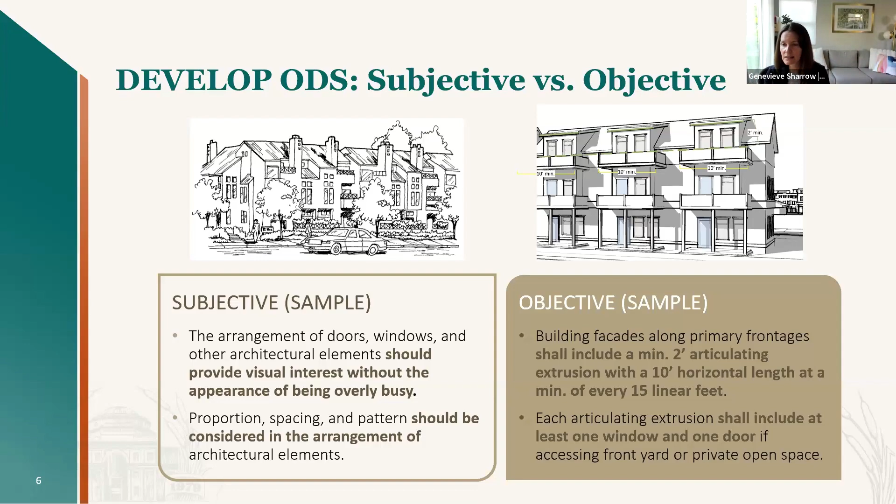We've also included, to make it as unequivocally clear as possible, some user-friendly checklists, which Kelly will also discuss, intended to make the process as clear for staff, the applicant, and the public as possible.

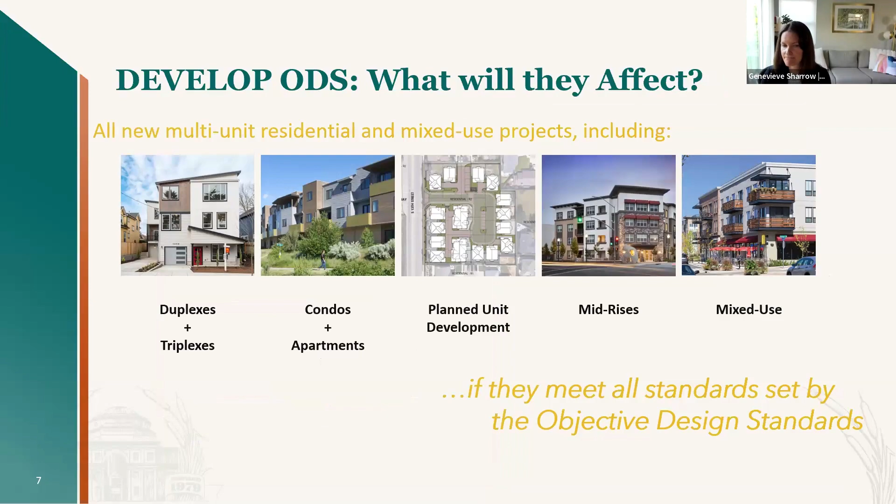So where will these new standards apply? State law states that objective standards should apply to all new multifamily residential projects and any mixed-use projects. So these will apply to duplexes, triplexes, all the way up to mid-rises or mixed use, if they meet the objective standards we've crafted. The objective design standards will apply in all city zones that allow those uses - multifamily or residential, and mixed use zones.

So with these new standards in place, Phil touched on the process moving forward. Development that's fully compliant with these objective design standards and all other requirements of the zoning and municipal code can go through this streamlined review process, limited to a construction permit review, CEQA exempt, and if compliant, can be approved ministerially.

However, the existing review process does remain in a variety of cases. It would remain if a project doesn't comply with the objective standards, and for any projects that are large, 50 or more units, or any mixed-use projects outside of downtown. Those three categories would continue to go through the conditional use permit process, including review and approval by this Planning Commission.

I wanted to provide a little bit of background on the process to date. We've been talking about this for a while now, I know you've been hearing about it for a while. We began back in June 2022 with stakeholder interviews. We talked to city council and the fire chief, local architects, and tried to identify the key issues that need to be addressed in the update.

Then through two working sessions with the city council during that summer, we further refined what the project should be and what the general design goals should be that were really the priorities for the city of Atascadero. In particular, we heard the desire to streamline development, but a real concern to retain the city's existing tradition and eclectic nature, and a special focus on outdoor gathering spaces, pedestrian vitality, and careful transitions to single-family neighborhoods.

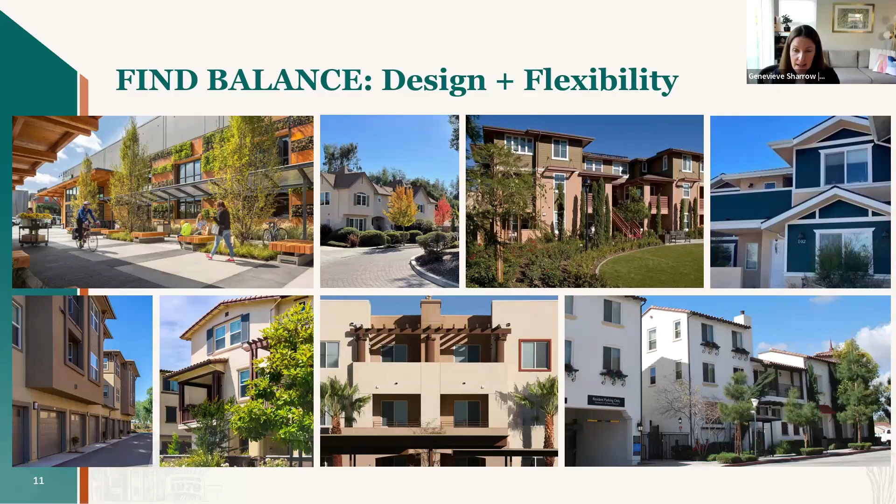Throughout the outreach discussions, we heard a common theme, which we infused into the draft standards: a balance between ensuring design quality reflects the high quality architecture that Atascadero wants, while providing the flexibility for architects, developers, and property owners to complete the projects they envision. So with that background, I'd like to dig in a little bit into the draft objective design standards.

As Phil said, the objective design standards can really be broken up into two main components. The first, which I'll focus on first, is the building design standards. These are the traditional objective design standards we think of, the design of the building itself. The second component is basically everything else, the site planning, trash enclosures, parking, and other amendments scattered throughout Title IX. We'll discuss those second, but start here with the building design standards.

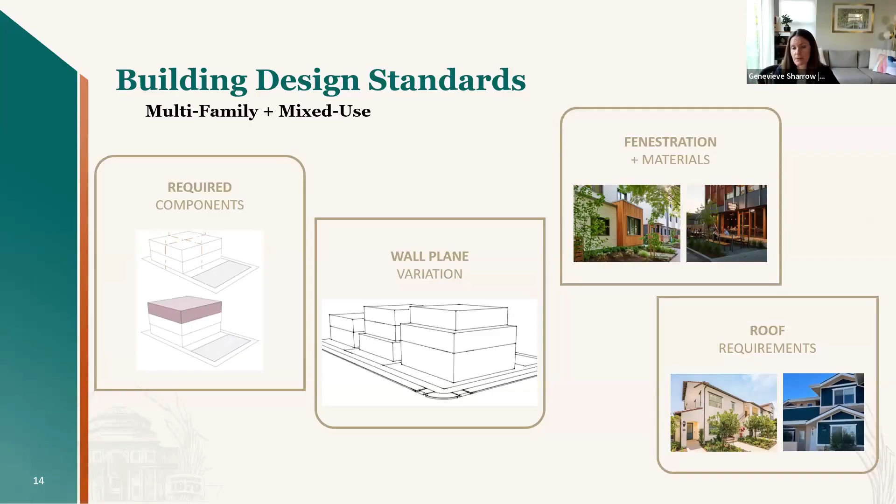These building design standards were drafted to address the input and direction we received from the community, to have clear flexibility built into the process. So there are menus of options for various topic areas, including how you can vary a wall plane, different materials and fenestration you can use, or different ways to vary a roof to provide interest. And then there are some standards that will be required for all new development to comply with the objective standards.

Each tier, those categories I just mentioned, are also referred to as tiers in the draft standards. Each of these tiers contains several different ways to approach that particular design type, different design elements that applicants can choose from to create their unique and high quality building designs while maintaining flexibility in the design theme. So the standards are structured so that larger buildings are required to provide more articulation or features to add to that design.

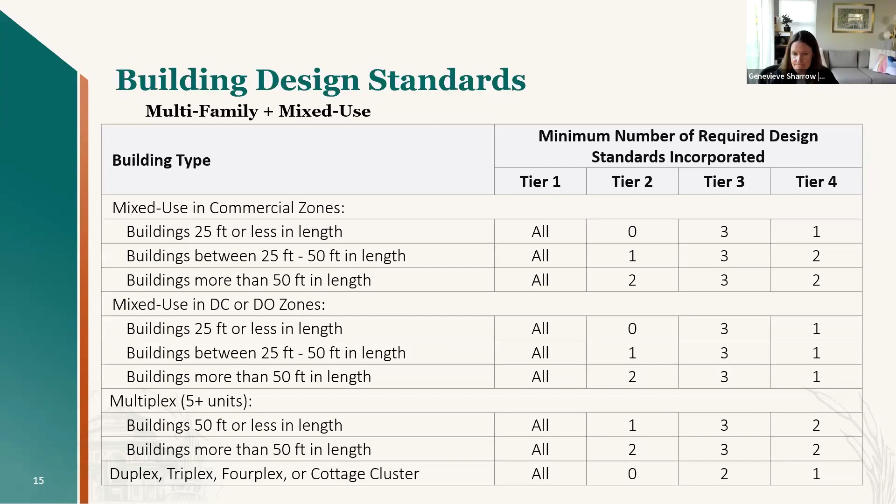The Tier 1 components are those that are required for all new multifamily and mixed use development. This tier includes a minimum ground floor height in mixed-use buildings to maintain viable commercial spaces, minimum transparency requirements for both residential and non-residential building spaces -- that's the windows and doors percentages -- and a limit on how long a blank wall could be.

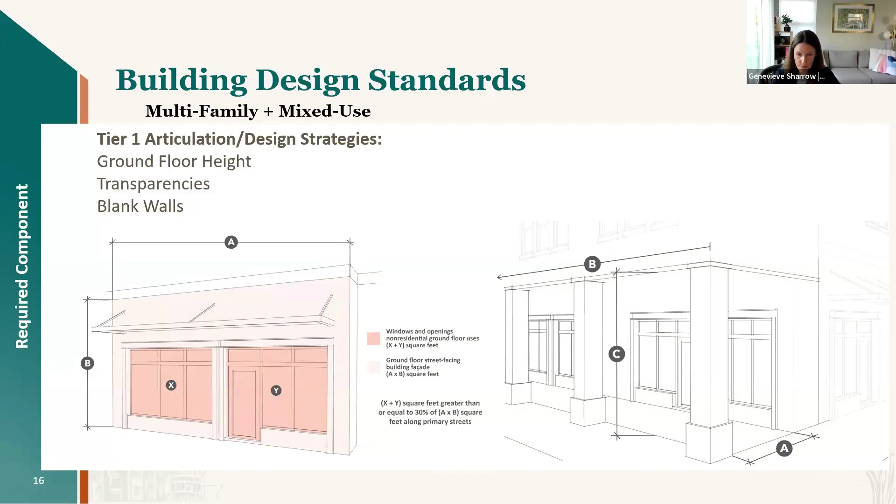Tier 2 design strategies pertain to wall plane variation. This tier is really important, critical to the creation of depth perception in a building and the creation of what's really important: shade and shadow within the building design. There have been studies in the past looking at what the average person means when they say they like a particular building, and what common feature exists throughout all of those buildings. It was found that it's that shade and shadow that really makes the difference in how appealing a building is to the human eye.

There are many ways a wall plane variation can occur, and we didn't want to limit to a particular design architecture that could not be conducive to certain types of design elements, so we wanted to provide a lot of different design options here. For this tier, longer and larger buildings are required to provide more forms of wall plane variation, and they can choose from a variety: balconies, plazas, upper story stepbacks, or any other kind of general massing break that breaks up the building. Small buildings and duplex and cottage clusters would be exempt from this requirement.

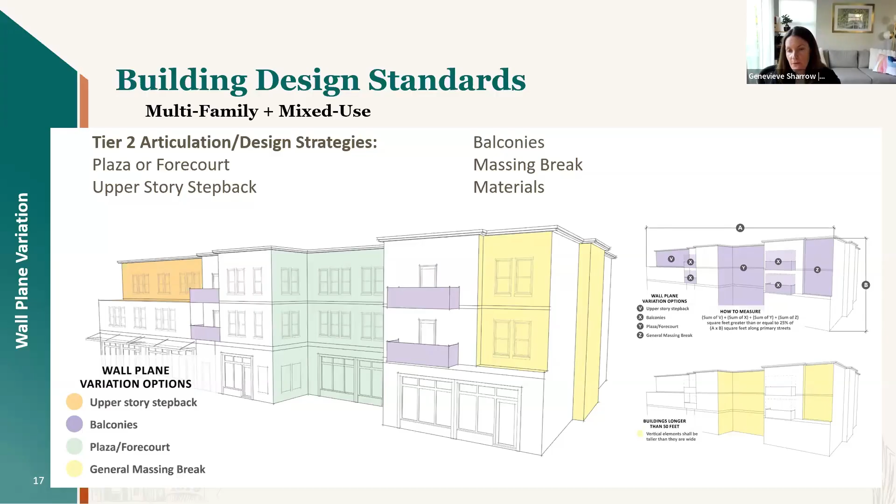Tier 3 design strategies focus on what's called fenestration and materials. Sometimes people refer to this as the gingerbread on the building, but it's really a critical piece in creating interest in building design. Fewer components are required for duplexes and cottage clusters in this tier, but projects can choose from a wide variety of options to enhance the facades, including larger windows, window trim, a window sill or a lintel on the windows. Other types of design like post and beam architecture can also comply, or including a secondary cladding material. So lots of options here to provide for variation.

When we've tested this against projects, it was very clear that there are many ways to meet the intent, and that projects can achieve this goal through a variety of different ways while having added intrigue.

The final tier, tier 4, focuses on roof design. This is really to encourage roof features that provide additional shade or shadow in more traditional residential styles, kind of having a larger eave and rakes and cornices, and also having the option to provide more roof variation with different types of roof styles or increasing gables. There's a variety of different options of ways that this can be met, and there's fewer requirements under the projects in downtown, recognizing the likelihood for more of a flat roof style.

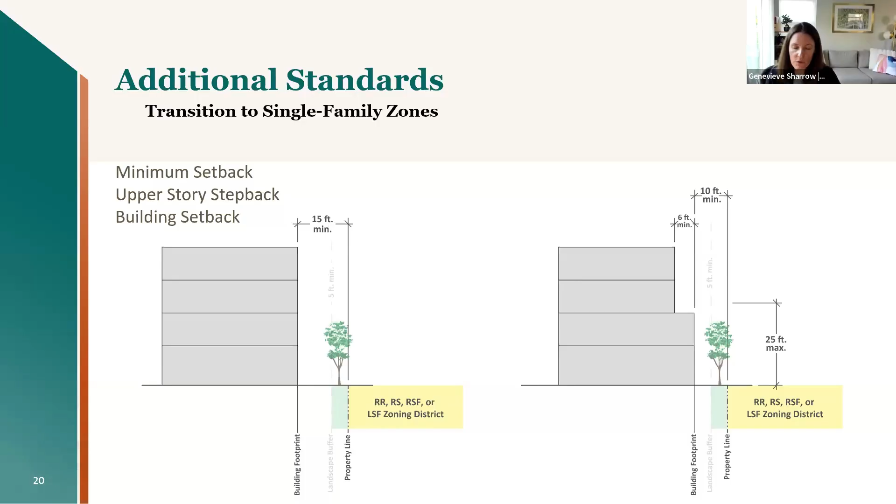A new cottage cluster section is also included with the objective design standards, and the intent here is to provide some flexibility so that the existing setback requirements don't constrain a cottage cluster type development. So these cottage clusters are really intended to foster a more affordable by design style, smaller houses and duplexes. Standards that were crafted center on providing a common courtyard with outdoor open space, which was a key desired design goal throughout the project. Private yards and private garages would be minimized. And then of note, this new section would facilitate future small lot subdivisions as well, outside of the more cumbersome planned development process.

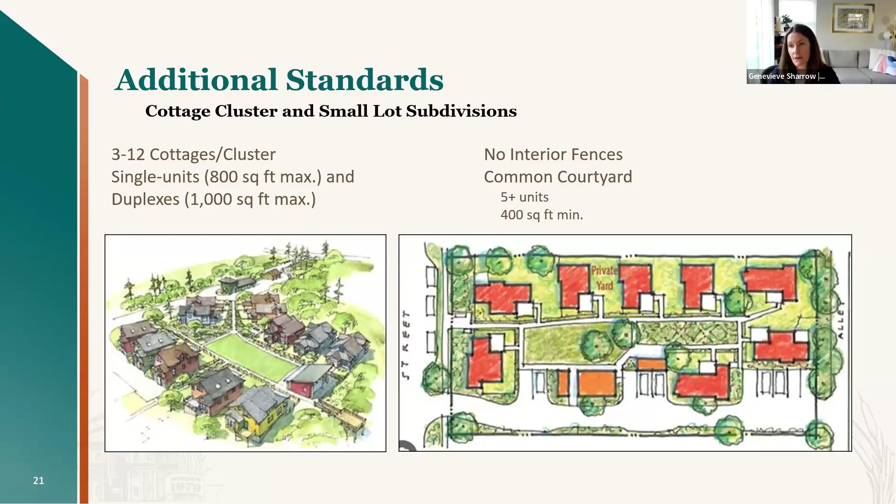Now I'll turn it back to city staff to discuss those proposed amendments in the other section of the zoning code.

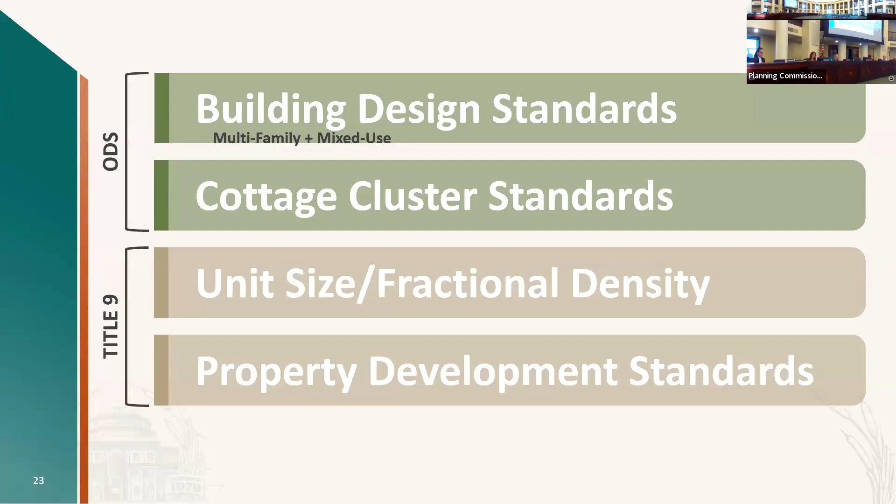Here's the fun stuff, Title IX. This is the other things that are outside of the objective design standards. So this is where we get into the interesting things like fractional density. Fractional density is one of my favorites, actually, because it's something I used to work with quite a bit. In a previous city I worked with, San Luis Obispo, they had this for many years, worked quite effectively, and it really incentivizes affordability by design. In other words, for a smaller unit, it's a smaller density count. So you can do more smaller units or you can do fewer larger units.

For example, in this proposal, a unit up to 600 square feet would only equal a half a density unit. A unit that would be over 600 square feet might be 0.66 of a unit. And then units over 1,000 square feet would finally get to that one density unit. So this program is optional, you don't have to use it, but it's there should you want to fit some additional smaller units and still stay within that density boundary that you've got in that district. I think it's a really good tool. It's not something that's typically included in objective design standards, but something we wanted to include at the same time as a zoning text amendment.

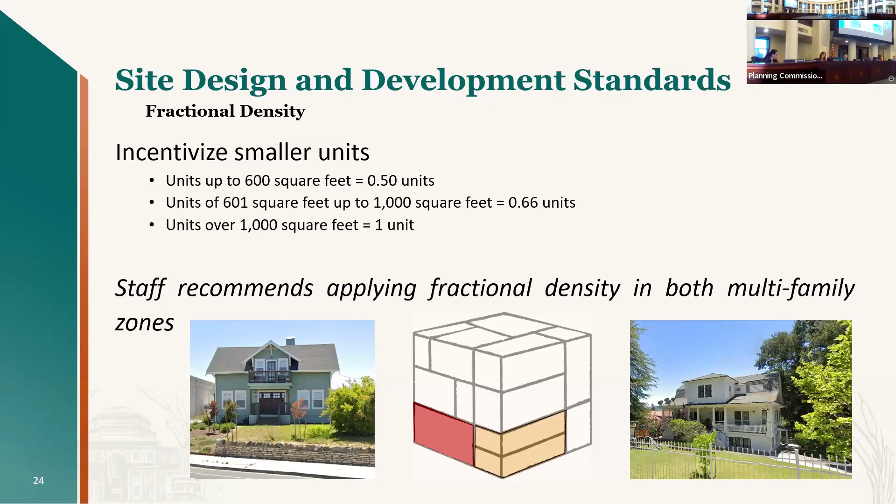And then also going with maximum average unit size. Now pay close attention to the word average. I think 1,200 square feet is the proposal here. We're not saying that the units have to all be less than 1,200 square feet, but in the downtown, to encourage greater density and actually to encourage projects to meet their maximum density, we're talking about this average maximum unit size of 1,200 square feet. So it means you could have several units that are 2,000 square feet, several units that are 800 square feet, several units that are 600 square feet, and you're still going to meet that average when you average it all out. This is something that's quite important because we see a lot of projects that have very large units and we don't maximize the actual number of units.

We don't maximize the density on the property because it just can't fit within the form that we allow for, and so then we fall short, commonly on our RHNA for that reason. This is really only a predicament in a multifamily zone or a downtown mixed use zone where you want to fit in that large number of units. That's where we have that issue.

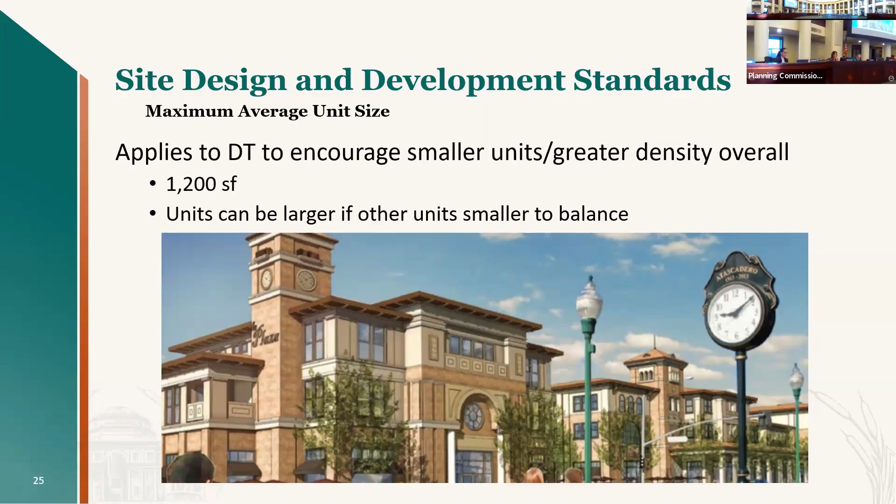So let's talk about some open space. Again, kind of going back to some tier 1 amenities, Kelly is going to give you some of these details and tell you about some of these features.

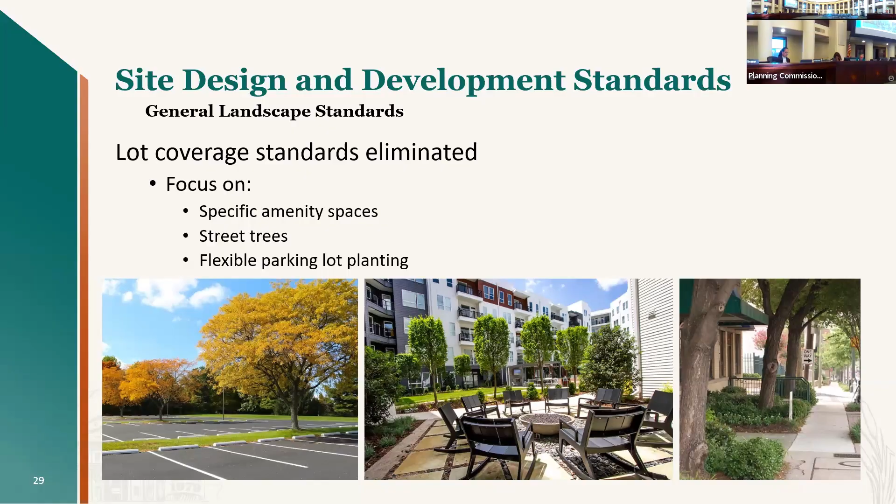We also incorporated some garage standards—I think Genevieve mentioned these as part of the cottage cluster standard, but we wanted to bring specific attention to it. Throughout previous development in Atascadero, the garage and automobile have been a big focus of multifamily development. We find a lot of interest in our area in slightly larger units with private yards and private garages, but the new trend has people asking for more community-based design with shared amenity spaces.

They perhaps have a private area in a yard off to the side, or a porch or deck area, and that necessitates the car being pushed more to the outside. So we have standards that limit garage size for private garages attached to units, to make them disappear a bit more and not be so auto-dominated. We also have standards about how many units can have a private garage, to accommodate community spaces and not give all that land over to driveways. We're hoping to encourage amenity spaces over vehicular spaces, and it's a way to help applicants meet those amenity space requirements.

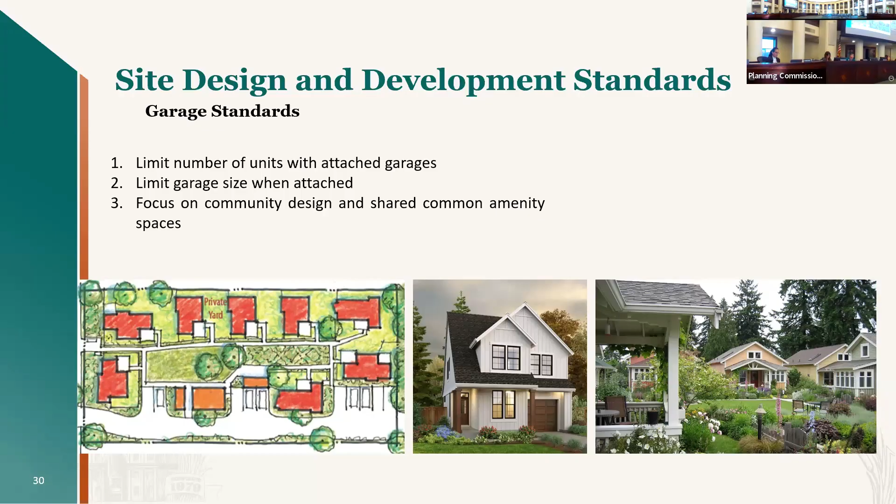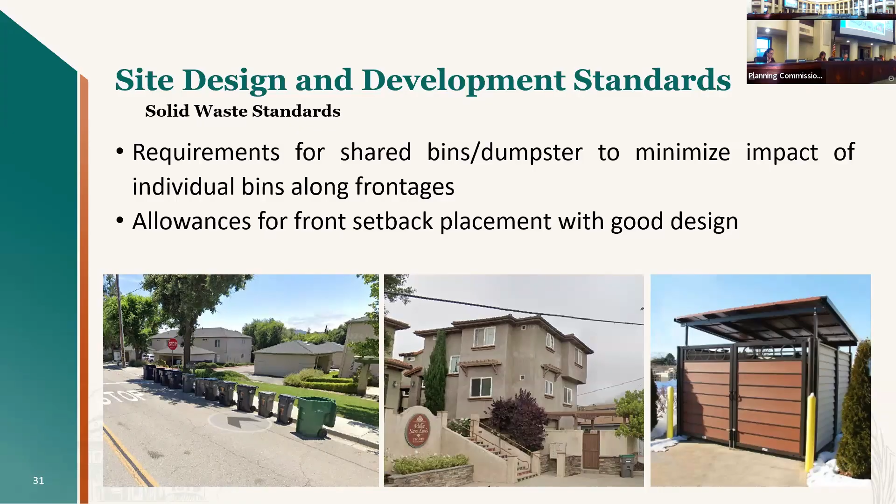So we looked at consolidating that into shared trash facilities. It doesn't necessarily have to be a dumpster, depending on the number of units—you could have bins if the trash company says that's adequate. You could still roll them out to the street, but in a shared situation to minimize the number of bins. We also have standards for what shared trash enclosures should look like, in terms of covering, making sure materials are consistent with building architecture, and ensuring enough room for recycling, trash, and compostables. We also allow placing trash in a front setback if that makes the best design sense and can be designed appropriately into buildings, since that's often the best place for the trash company to service it.

We also looked at our storage standards. Our current code requires 100 cubic feet of storage and doesn't mention much else. When we looked into it, we considered what people in denser multifamily developments actually need storage for—often bikes, outdoor play equipment for kids to take to a park, Christmas decor, and similar items that don't fit in a closet. We found a lot of applicants were meeting the requirement just by providing a wall of bookshelves, which didn't give people usable storage. So we've shifted to a slight increase in required storage size per unit, to accommodate things like a bike locker or storage under the stairs.

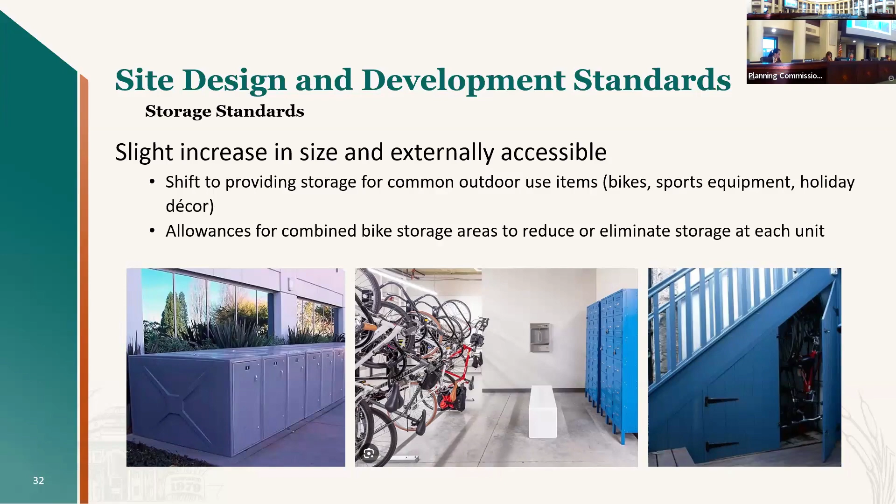We also allow combined storage throughout the development. So similar to our microhomes development, you could have a shared storage facility to store and lock up bikes securely for all residents, or a couple of garages or sheds along the property line that residents could use. Those storage standards are a bit more flexible and larger to accommodate people's needs.

We also looked at lighting standards. Our current standards require full shielding of lighting and no glare visible off-site, but that's open to interpretation—how tall a human is that can see the glare, how tall the light poles can be. So we added additional standards to clarify that.

We used standards we typically see in conditions of approval for use permits, covering parking lot pole height, specific shielding of lighting with a certain dimension of shield that the lens needs to be recessed or shielded, and dark sky compliance, which is a major focus in Atascadero and part of our current general plan.

And of course we have exceptions written in for decorative lighting, which we didn't really have before. I don't know that back in the 80s when the lighting code was written they had a lot of festoon and decorative lighting, but we wanted to make sure our multifamily areas, amenity spaces, mixed-use areas, and commercial areas could utilize that decorative lighting.

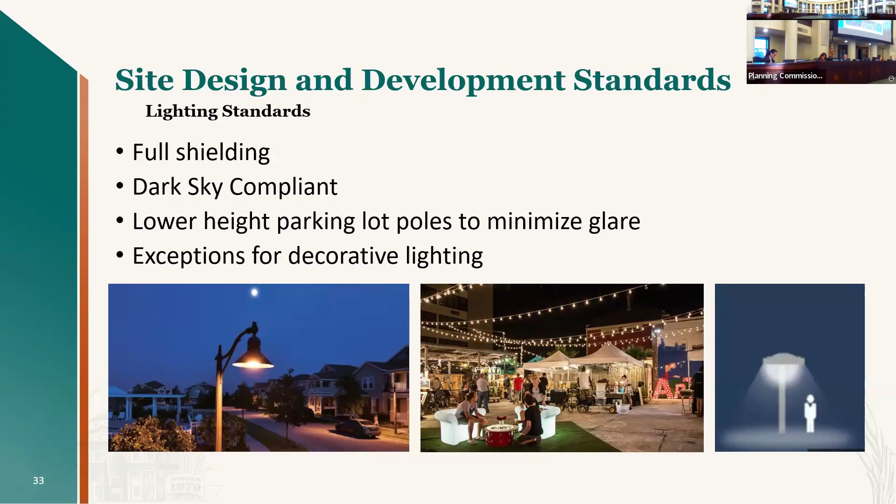Our code right now requires that new development projects put in street trees generally every 30 to 35 feet. In downtown, it's different because the street trees are generally in the public right of way, in the public sidewalk. That's where it makes sense downtown, since downtown is a much more intensive area. We have different standards for downtown.

One of the things we were trying to do through this process is amend the code so that projects outside of downtown could also incorporate street trees, but not in the public right of way, not in the sidewalk—instead on private property. That's where they're more readily maintained by private property owners.

That's where they don't interrupt the public right of way, damage the sidewalk, damage the infrastructure, and there's space for them. So we initially proposed a 15-foot setback for buildings to fit these trees, consistent with what we have in our code today. Right now our code calls for a 15-foot setback for residential projects outside of downtown, even those within a commercial zone, like a mixed-use project. So the proposed code doesn't really change that standard, but we need to clarify what this setback standard is.

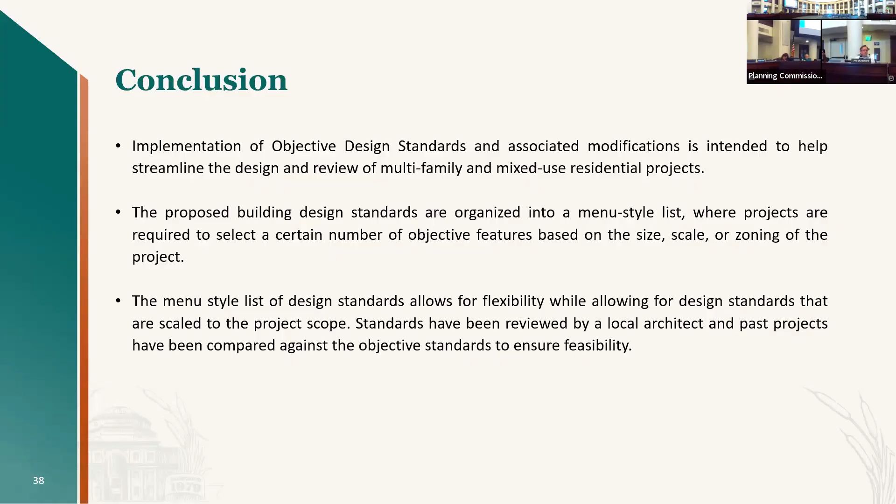The idea is that these are flexible menu lists where they can choose different options to comply. They're not stuck with a one-size-fits-all approach. They have different features based on the size and scale of their project, allowing for flexibility while having design standards scaled to that project. Again, these are not architectural standards that set architectural styles. Instead, they're objective standards about form, massing, setbacks, height, even color, transparency, windows, etc.

So, last slide—is there any big celebration at the end? It's been a long presentation. So the next steps: you can suggest changes. We're going to move forward to introduce this to City Council for adoption. We do hope to have this in effect this summer so that we can focus the rest of our time, attention, and staff time on the general plan update. Thank you.

Thank you, Phil and Kelly. It was a wonderful presentation.

So I'm going to open it up to the commission for comment, and since I have the mic, I get to go first. My first question is—we kind of talked about this a little—how does the density bonus affect these standards? Do they get to throw out the design standards, or what do they get to throw out and what do they not get? My thought is, do they get to come in and build a square building with none of the design standards because they have a density bonus, and make a big ugly building?

That could happen. It all depends on the level of concessions they're eligible for based on the level of density bonus they're doing. But if they ask for relief from standards, they can. So certainly there's a chance that a project that has some affordability—complies with that basic 10% affordability—then gets the density bonus. They don't have to use the density bonus, but they get these concessions. Would they then, because they don't conform to the objective design standards, come before us? So would we at least get to see the project before it's approved?

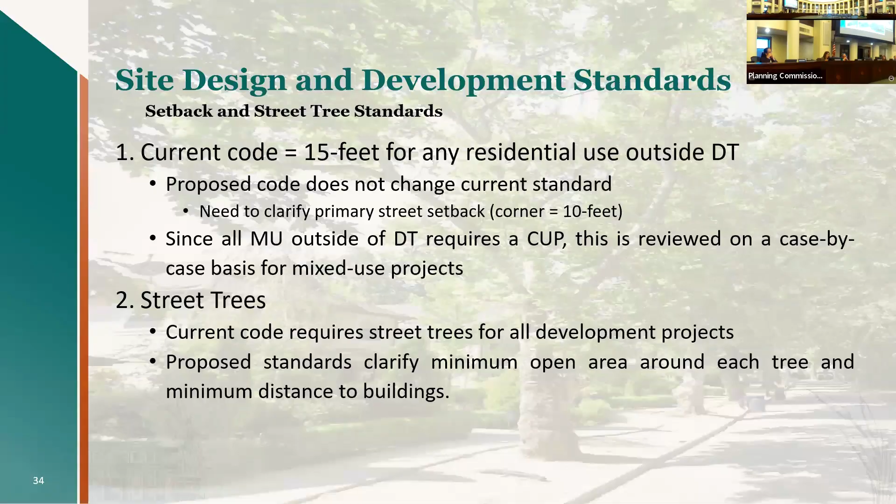Thank you. Yes, Commissioner Kronza. Okay, thanks again. Can we also go back way earlier in the presentation to the piece where it says which zones are actually being talked about for the ODS?

That's way up there, I know. I was going to say, that's a lot of slides. Well, let's just take a little gander again. Let's go back to memory lane.

Okay, so if we look at the multifamily zones, I think Commissioner Anderson made a good point, so I wanted to review that list here. Because I'm really empathetic to, okay, what do we not want or what do we want to avoid, right? But then there's the, okay, well then what solutions are going to get us there? Because if we only look at what we don't want, I don't think that's a holistic management plan for how we're going to get to what we do want. So if we're just trying to avoid something... So, all right, we've got downtown office, downtown commercial, commercial service, retail, professional, neighborhood.

But then it sounds like where you draw the line, not to put the hot light over there, but I am interested in the discussion. For multifamily, not having them incur a fee or extra taxation for more common trees, but something like a downtown taxation district, for some of those more common street trees and landscaping that we want more of and more attention to. I feel like that's where there's a blend between number 2 and some of these other things, where we want private property to cover, like the multifamily, we want to cover their own trees.

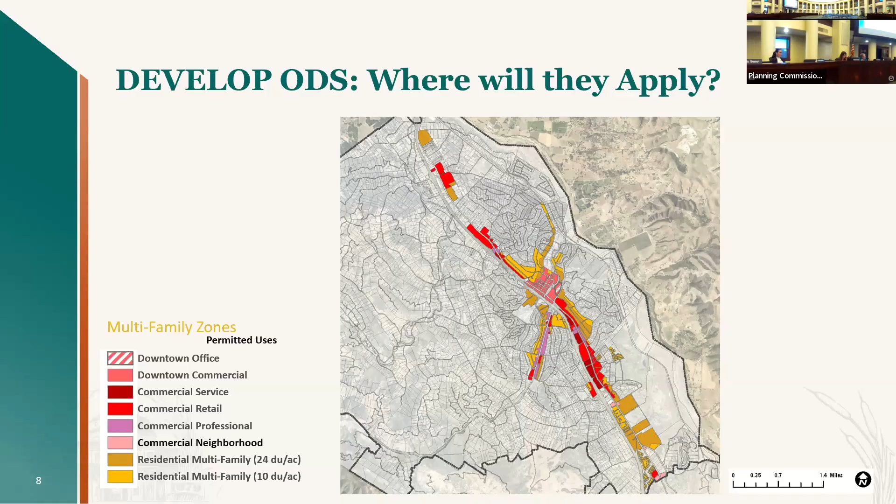If we are on the fence about street trees and we're fine with more pavement, then that could be something to explore, but I wouldn't talk about it as if it could be a guaranteed thing. I'm not crazy about more pavement, but I feel like we need to frame it as an incentive to the property owners - trees are great, you want trees because, and here's what you're required to plant. Because there's social and economic benefit, and environmental - exactly. They're beautiful, they provide shade, the wind rustling through them.

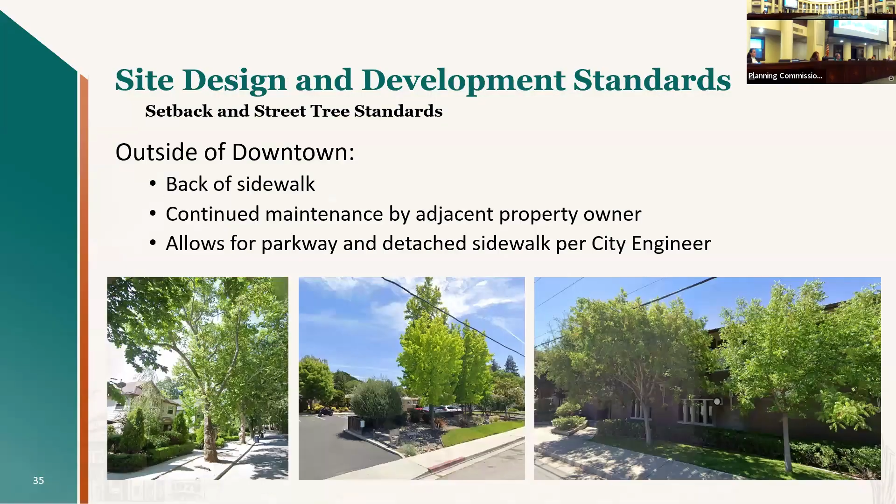Yes, Mr. Vanden Eyck - it is possible to have a landscape and lighting district that just applies to certain properties. It certainly is, of course that would be a discussion for city council to take up, and then it would have to go through the whole 218 process. So that's nothing we can approach today, but I'm dealing with a similar project in the city of Guadalupe where Caltrans is coming through and they want to do this complete streets project through downtown.

There's competing issues between the downtown owners wanting bigger street trees, but they can't be accommodated with a 10-foot sidewalk and zero lot line setbacks with the buildings. So Caltrans is coming in saying, hey, we can add bulb-outs, but then they're worried about removing parking. So there's competing things going on there. It's a very complicated issue that we certainly can't decide on tonight.

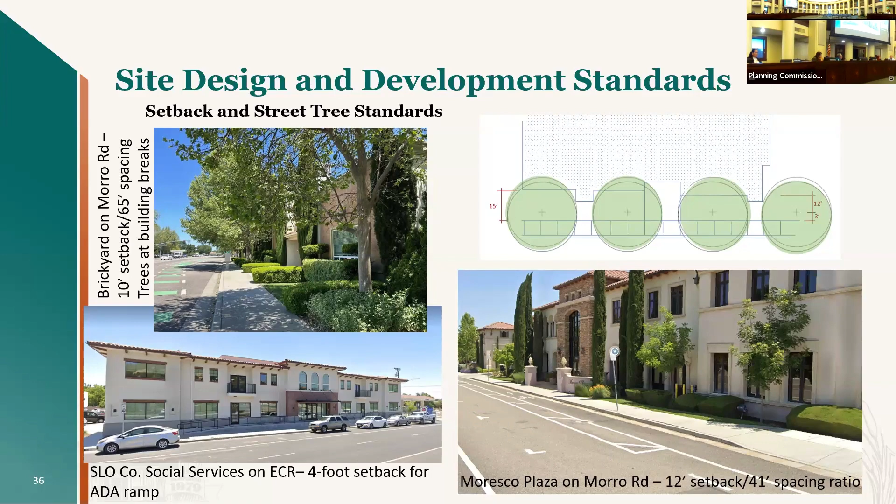But I do agree with probably a hybrid of number 1, 2, and 3 - I think those are probably our best options. And I agree that if it's in the multifamily areas, it should probably be on the property instead of in the street. But if it's in the downtown or commercial zones, it should probably be a street tree in the public right of way. That's my thought. Did we help?

Yeah, and oh, I can probably boil this down. I mean, this question is really not about the downtown - downtown's already done because we already allow trees in the right of way. We have that requirement, we can fit them, we have big sidewalks. This is about outside of that.

I think really what we're looking for from you is more of a general direction anyway - should we be pushing street trees for these areas where they can't fit today, and should they be on private land or in the public right of way? The public right of way is problematic, we've kind of expressed that to you. Private land is easier, except there's a concern about how it infringes upon the rights of the property.

So I think what I've heard in general from the commission is: have flexibility, don't take away their property rights to develop, but we still want to see trees. And can the building design accommodate it? And I think it can.

And 1, 2, and 3 has those options. So I think we're feeling it's a tough topic. There's no easy one size fits all, 'hey this is it, this is your perfect answer.' It's not. Each building is different, each site is different. Sometimes you're going to get multiple buildings in one project and it's easy.

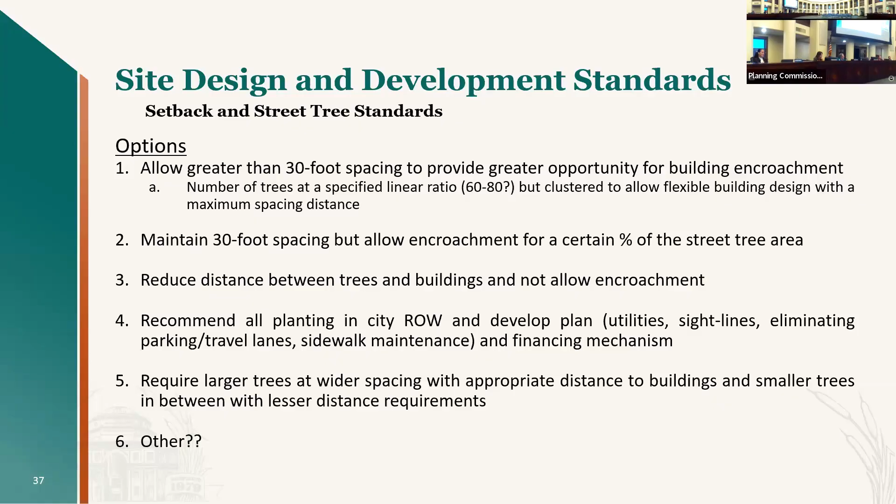So it's done. We have to make a motion, right, to send this to city council? We have a slide with the recommendation I didn't read to you, which asks you to adopt draft resolution A, recommending the council introduce an ordinance for first reading by title only to establish objective design standards for multifamily and mixed-use developments, and update existing development standards as needed for consistency.

Quote unquote, that would be Title IX. And so that's us saying, yes, we like this. City council, you should review it. But we took notes on some of the discussions and comments you've had.

Okay, would anyone like to make a motion? I move. I make a motion to accept the resolution as written.

Would you like to include anything about street tree options? I would definitely like to strike and add the option to have street trees funded by taxes.

Maybe I can summarize what Phil summarized, and you could see if you would like to include that in your motion. So I think we talked about developing a similar menu style option for street trees that would allow some flexibility in what people could do along their frontage. Some might include more reduced setbacks and some with greater tree spacing, but a menu of options that would allow somebody to choose what would work best for their property behind the sidewalk.